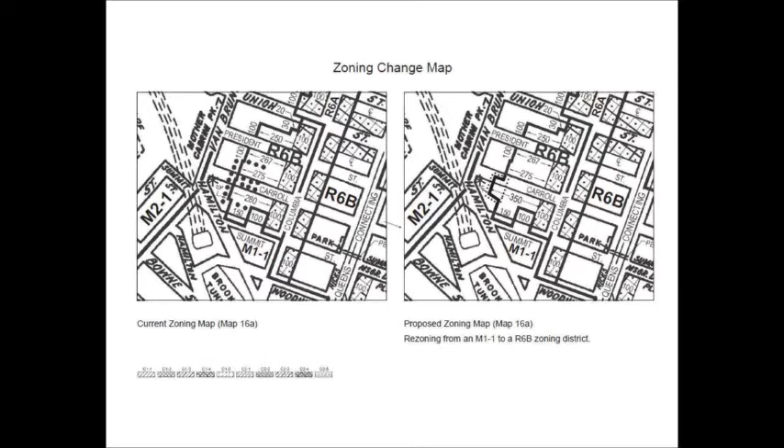In this photo, this space here is where the proposed development site is located. The zoning map amendment would rezone 3 tax lots from M1-1 to R6B, extending the neighboring R6B district to include the development site. Additionally, the zoning text amendment would establish a mandatory inclusionary housing area coterminous with the rezoning area.

The block within which the development site is located, block 352, and the block directly to the north, block 347, have been subject to a series of zoning changes similar to this application, changing existing M1-1 districts to residential districts to facilitate residential development.

In 2007, there were 2 such zoning map changes, one on each of these blocks, that changed an M1-1 to an R6 district at the time. So on the subject block, it was this little portion here that was rezoned.

More recently, in 2011, there were another 2 zoning map changes adopted from M1-1 to R6B district, again one on each of these 2 blocks. At that time, there were 6 tax lots located here, which brought the western edge of the R6B to where it is today.

In 2009, an approximately 86-block area of the Carroll Gardens and Columbia Street waterfront neighborhoods were rezoned from an R6 district to contextual zoning districts in order to reflect the scale and built character of the area.

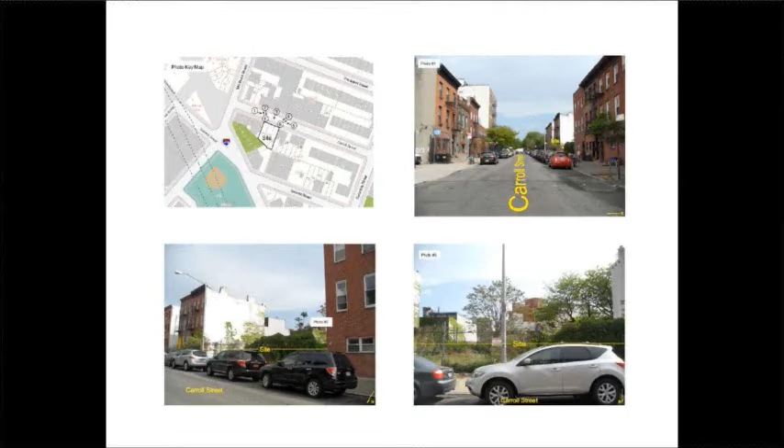Here are some photos of the existing conditions. We're looking at Carroll Street, and then taking a closer look again at the proposed development site, along with some photos of the developments directly across the street.

The proposed development is a 4-story, 10-unit residential building with a total of approximately 12,450 square feet of residential floor area, for a floor area ratio of 2.0.

There's an entrance to a driveway located right here on Carroll Street that will provide entrance to and egress from a driveway that leads to 6 accessory parking spaces located in the back of the building.

Because this application includes a rezoning from a non-residential zoning district to a district that allows residential uses as of right, a mandatory inclusionary housing area that is coterminous with the rezoning area would be established. All residential developments, enlargements, and conversions within this mandatory inclusionary housing area that meet the criteria set forth in the mandatory inclusionary program would have to comply with the requirements of either option 1 or option 2.

Option 1 requires that 25% of residential floor area be affordable to households that average 60% of the area median income, with a minimum of 10% of all residential floor area being affordable to households at 40% of the area median income. Option 2 requires that 30% of the residential floor area be affordable to households that average 80% of the area median income.

To facilitate this project, the applicant requests a zoning map amendment to rezone 3 tax lots from an M1-1 to an R6B district, as well as a zoning text amendment to establish a mandatory inclusionary housing area that's coterminous with the rezoning area.

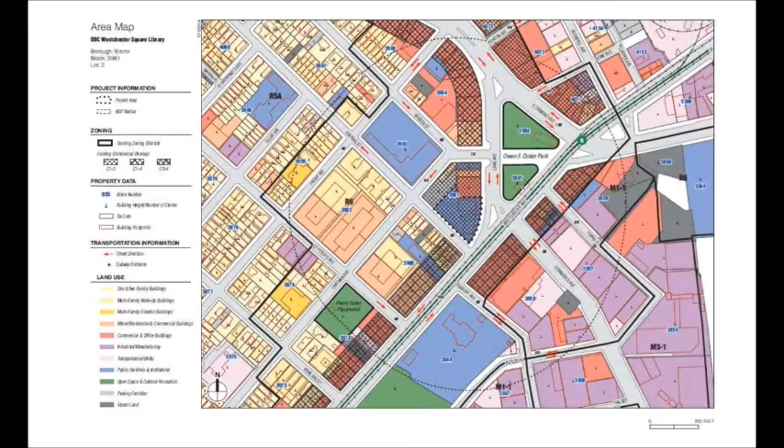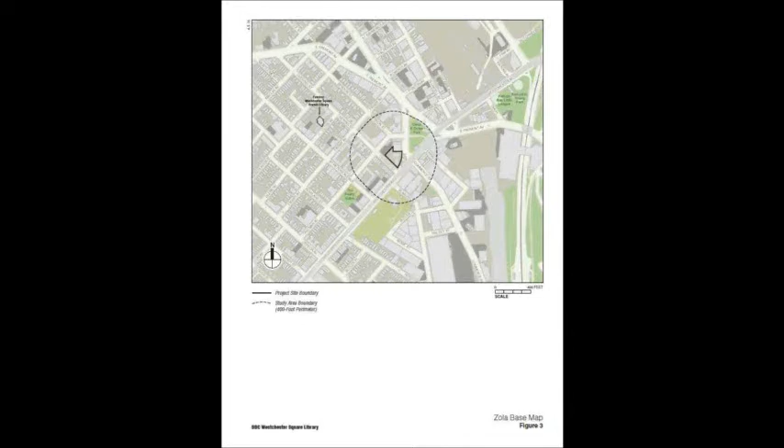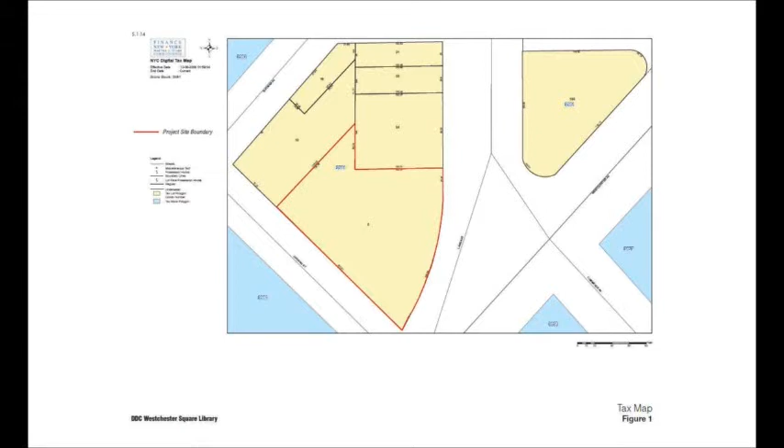For that reason, the intention is to subdivide. This is the existing property, which is now owned by the Huntington Free Library. This is a landmark building, and in addition to the library structure, the landmark structure itself, there is an annex building built in 1930, which is landmark eligible but is not landmarked. That will be part of the subdivided portion of the lot used for the new branch facility. In addition, there is a one-story enclosed connector connecting the main landmark building with the annex building.

Under the proposal, the existing lot of approximately 22,000 square feet will be subdivided. The free library will continue to operate independently on an approximately 13,000-square-foot reconfigured zoning lot. A new zoning lot will be created of approximately 9,000 square feet, and that will be the location of the new branch library. Here we have some images.

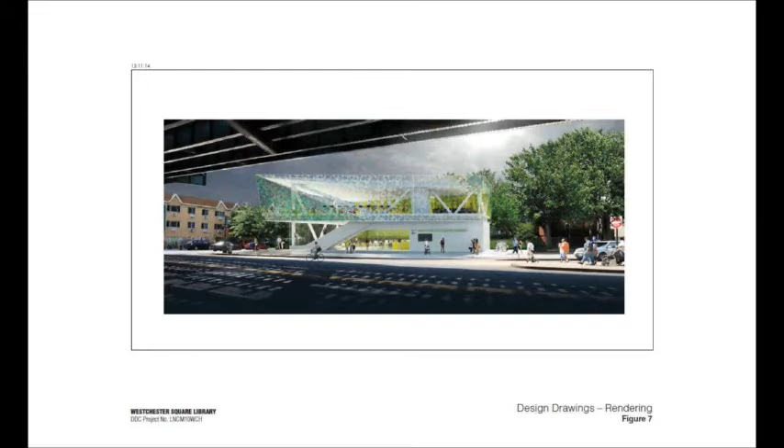Again, this is designed to be LEED eligible, ADA compliant, and the format is designed to reflect the new service modality, if you will. There will be 12,000 square feet of floor area on a two-story building. As the diagram shows, there will be one management kiosk that provides visual access and control of the entire floor. There will be a community room available for community activities, with new furnishings.

This will again be LEED eligible. To the extent possible, green design elements are included. There will be a new entranceway created along Westchester Avenue, which will include landscaping and a sitting area for the public. In addition, the grounds will be fully landscaped.

The Landmarks Commission has been informed and is approving of the proposed development project. There will be no impact on the landmarked Huntington Free Library other than the repair of the connection where the corridor links to the annex building. There will be, or has been, a landmarks determination in your package that there will be no significant effects of this proposal.

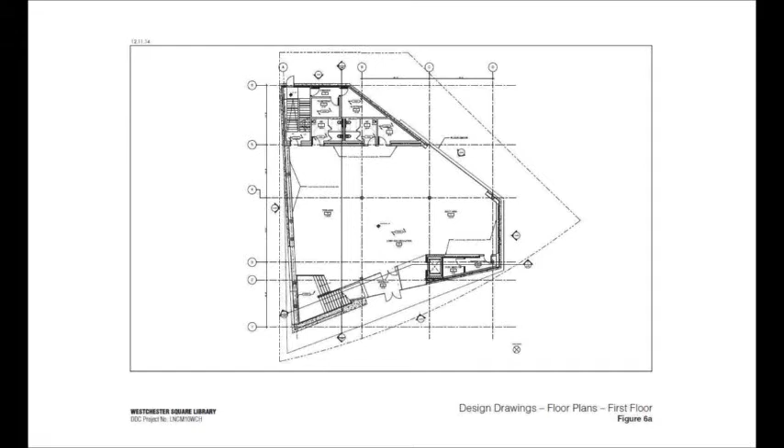Thank you, Dana. Questions? Yes, Ms. Effron, then Ms. Ortiz. Is the Huntington Free Library operating as a library now?

It is operating as a private research library, and it is landmarked and will continue to operate independently. We're acquiring a portion of the lot, not inclusive of the main building of the Huntington Free Library -- we are getting approximately 9,000 of the 20-some thousand square feet. So the library will continue to operate independently. DCAS will acquire the newly created zoning lot, and that will be the site of the new branch library.

Thank you. My understanding is the Huntington Free Library is outside the NYPL system -- independent of the public library system and will continue to operate independently. Ms. Ortiz: my question was answered, thank you. Any other questions? Ms. Levin?

You know, I realize that design is not exactly our purview on this one, but this looks like a really intriguing design -- on that page, right there. The thing that looks like a diagonal escalator, is that an escalator? It's not an escalator, it is a stairway up. Again, you have the open design; the intention is to maximize the natural light. The building is configured essentially to provide a view of the landmark Huntington Library next door.

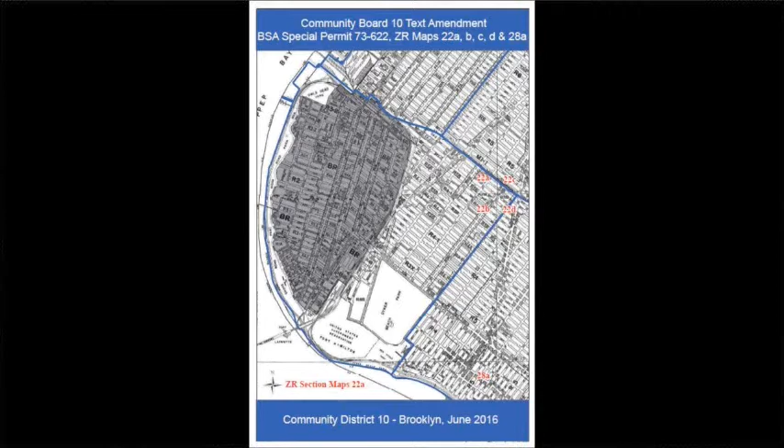These lower density and contextual districts include the 1- and 2-family R2, R31, R3A, R3X, R4A, R4B, and R41, and the multifamily R32 and R5B fronting many of the tree-lined avenues and most mid-blocks.

The multifamily and mid-density districts, R6A, R6B, R7A, and R7B, are mapped along the wide streets, including 3rd, 4th, 5th Avenue, Shore Road, Fort Hamilton Parkway, 11th and 13th Avenue. These wide streets have larger apartment buildings ranging from 4 to 8 stories, and with some exceptions, commercial overlays ranging from C1 and C2s along the local retail, allowing for local retail servicing the residential areas.

Now, the history of the BSA special permit. Back on December 22nd, 1997, the Planning Commission approved an application creating a new BSA special permit, the enlargement of single-family and two-family detached and semi-detached residences, originally intended as a citywide initiative.

During the City Planning Commission public review process, the applicability was restricted to 7 community districts: Brooklyn 10, 11, 15, and portions of Brooklyn's 12 and 14, and Staten Island's 1 and 2. Subsequent to the Planning Commission's approval, the City Council modified the text amendment, removing the Staten Island community districts 1 and 2. Though today limited to 4 community districts, the February 1997 Planning Commission report discusses the overall land use rationale for approving this special permit.

Citing the advent of contextual districts approved in 1989 and their more liberal FAR, front, side yard, height, and setback requirements that match the character of many low-density areas, reducing the degree of noncompliance. But as many of the low-density areas of the city had not been mapped as contextual districts and large numbers of residential buildings still remain non-complying, there was a need for an equitable process where homeowners who wish to enlarge could do so in a manner consistent with the surrounding neighborhood.

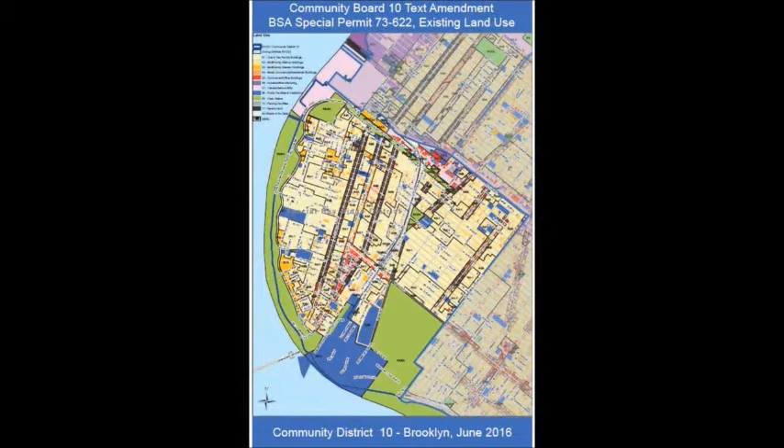From the department's point of view, CD10 is unique in so far as it had a special district that predates the text. Subsequent to the text, lower density and contextual districts were widely mapped throughout the district, some 400 blocks. There's a limited number of applications for CD10—only 21 applications over the last 18 years. By comparison, Boards 14 and 15 have had well over 200 applications each, in excess of 200 applications.

So it's just the text, which just takes out 10. You can see from this graphic that the 21 applications are widely spread throughout the district, not concentrated in any particular area.

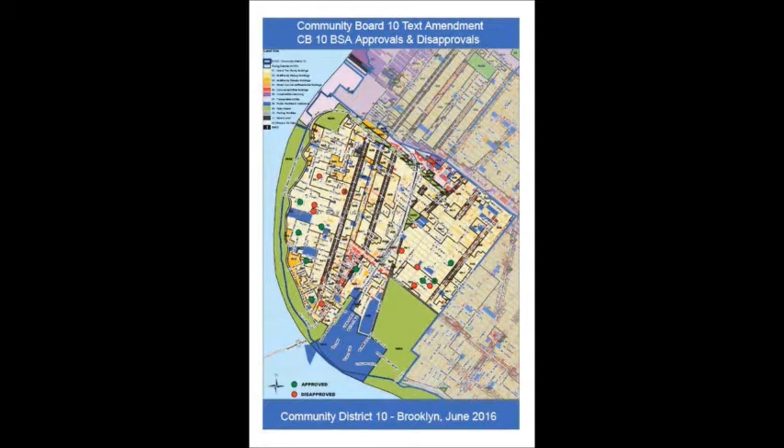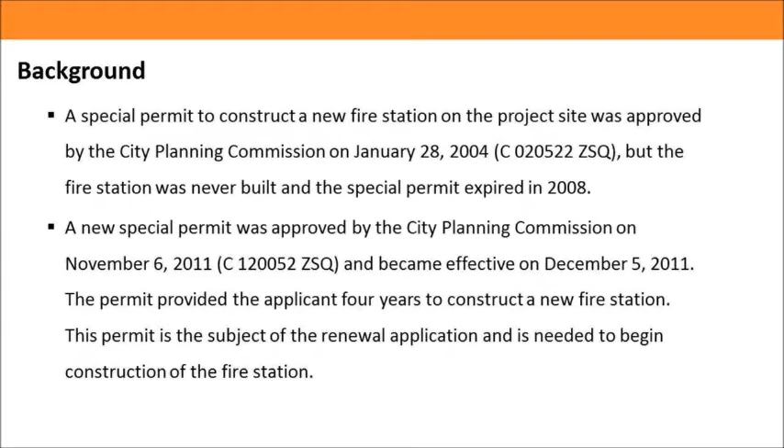Now, this is not the first special permit the Broad Channel volunteers had. They had a special permit in 2004, but the firehouse was never built, and the permit expired in 2008. They came back to the City Planning Commission for a second special permit to facilitate the same firehouse construction. That special permit became effective in December 2011 and is the subject of this renewal application.

Just to orient you where the existing firehouse site is, it is located on a relatively dense residential block on Noel Road in the middle of Broad Channel. The firehouse, as you see in the bottom picture here, was built in 1907, and that is where the Broad Channel Volunteer Fire Department provides emergency services at Broad Channel.

I'm highlighting here in the picture that the building is actually so small that they don't have the space to park all of their vehicles in the station itself, so they often need to find on-street, or in this case, on-sidewalk parking. But they have acquired, dating back to 1999, a vacant site that was formerly city-owned to the north of the current firehouse location, where they'd like to build a new 2-story, 10,000 square foot fire station.

They've secured all the funding that they need for the project. It's just a matter of getting that funding passed through the various agencies that have identified it for them.

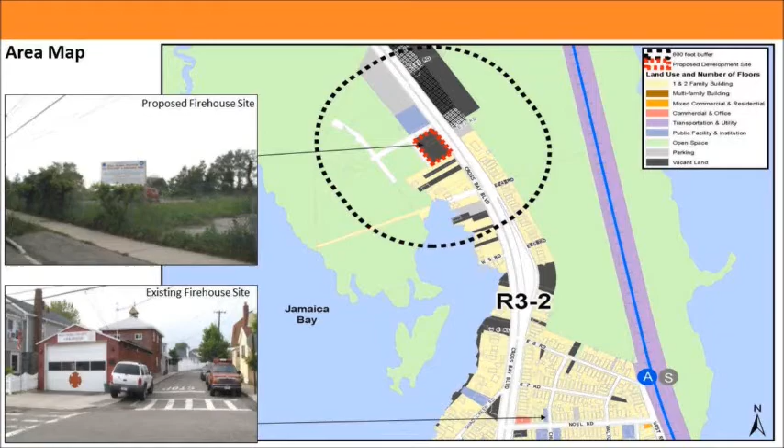Here's an elevation of the firehouse, again 2 stories, which would provide plenty of space for the Broad Channel volunteers to park their 4 trucks and the 1 boat that allows for responses to emergencies on the waters of Jamaica Bay.

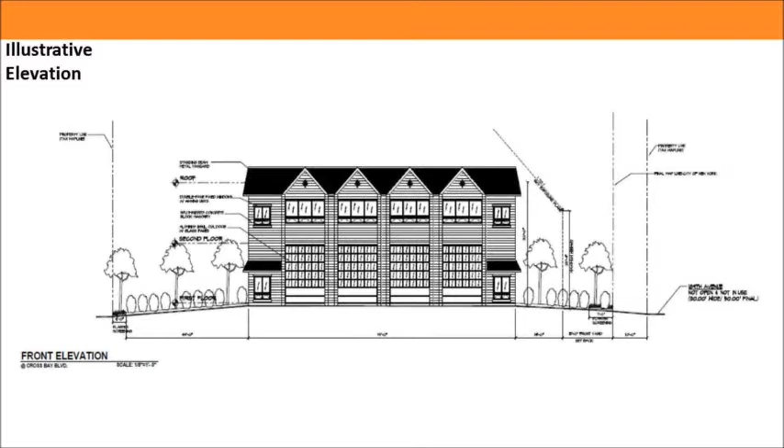As I mentioned, the permit can be renewed through City Planning Commission approval, so long as the commission finds that the facts based on which the original special permit was approved have not substantially changed. The project site has not substantially changed, the project has not substantially changed, and the Broad Channel volunteers maintain that the findings based on the facts of the original special permit have also not substantially changed.

In your commission packages, we did refer this out to Community Board 14 for 45 days, and they provided a letter continuing to express their support for the Broad Channel volunteers to build a fire station.

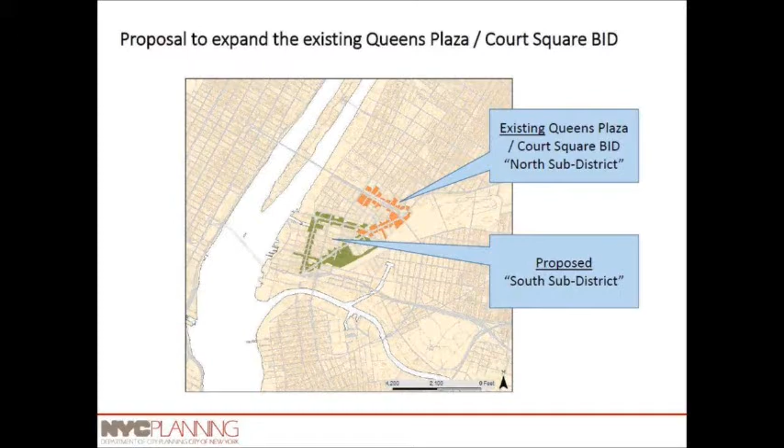This map shows the location of the existing BID, which will now be the North Subdistrict in orange, and the proposed expansion in green, which would be referred to as the South Subdistrict. The North Subdistrict includes properties along Jackson Avenue north of Court Square and businesses along Queens Plaza. The South Subdistrict includes properties along Jackson Avenue south of Court Square, along Vernon Boulevard and 44th Drive.

For context, the BID comprises much of the commercial core of Long Island City. To the north and east of the bid area, there is a concentration of industrial businesses, but the bid has decided not to include these in the service area because the needs of these businesses tend to vary from the commercial businesses at the core, and initial outreach suggested they were less interested in being part of this bid.

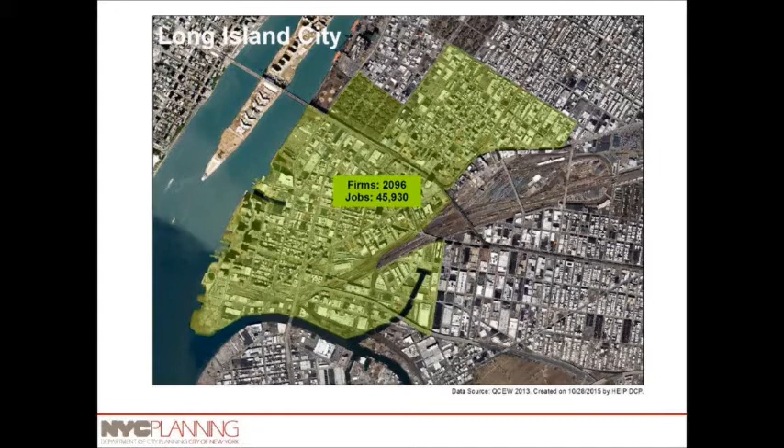Since 2001, there have been a number of zoning actions affecting most of Long Island City, and there's currently a significant amount of new residential and commercial growth in this area. In 2013, there were more than 2,000 businesses that employed nearly 46,000 people.

Looking at the existing North Subdistrict, there are 2.8 million square feet of office currently, and another 1.1 million square feet in planning. What's really staggering is there are 669 residential units and 4,085 in planning or construction. There are 47 existing businesses, including a few large corporate back offices, a number of retail businesses, and 2 hotels. Presumably, as many of those residential units come online in the next several years, there will be more retail and other businesses in that area as well.

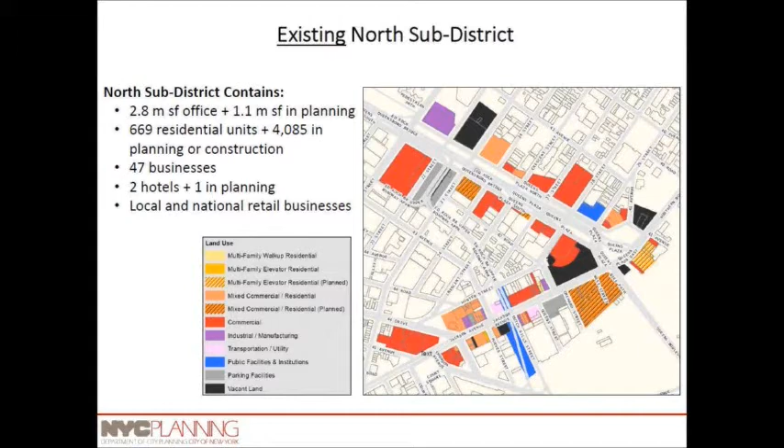Looking at the proposed South Subdistrict, this is a much more mixed area and has quite a few more businesses. There are 190 businesses, many located along Vernon Boulevard on the west side of the proposed bid, which is really the main commercial spine of the area. Many of these are in 2 to 3 story buildings, often with retail or professional services on the ground floor and residential above. There are also 18 industrial businesses.

Many of these are lighter industry, auto repair, and general contracting. There's also a lot of residential growth, with 2,700 units in planning or construction in the South Subdistrict.

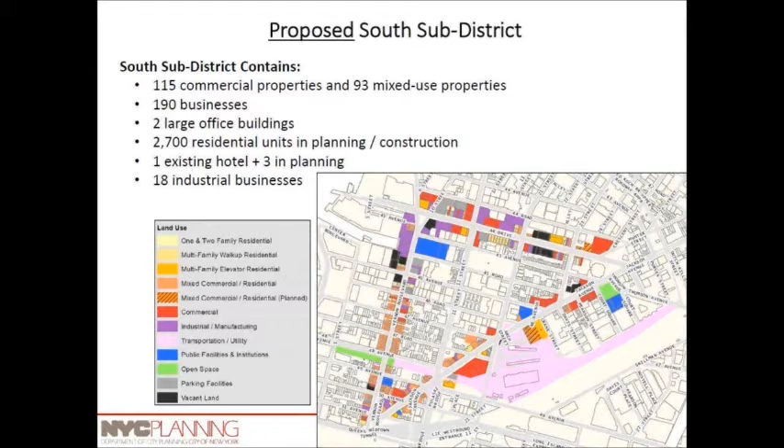There are several small public spaces, both within the bid area and some adjacent to it but within the general corridor. The image on the top left is from the Citibank building, maintained by Citibank. On the bottom left is a vegetated median along Jackson Avenue, which the bid currently maintains with funding from EDC. On the right side are images of small parks along the bid corridor that are excluded from the bid service area. The bid has explained that they would be supportive of efforts to maintain and enhance these areas, but do not want to take on full responsibility for their maintenance.

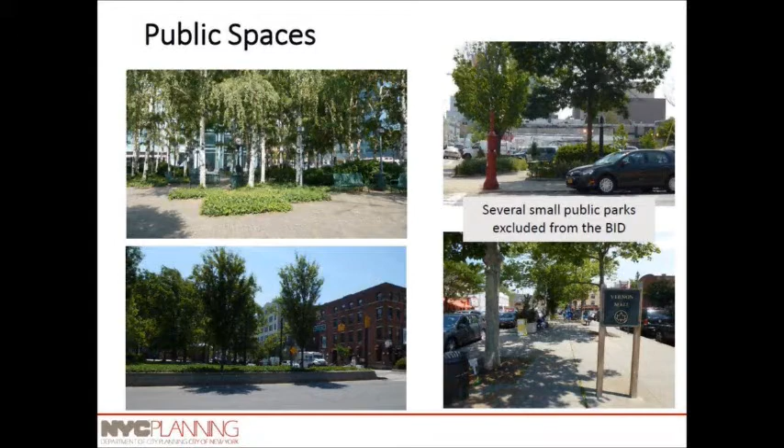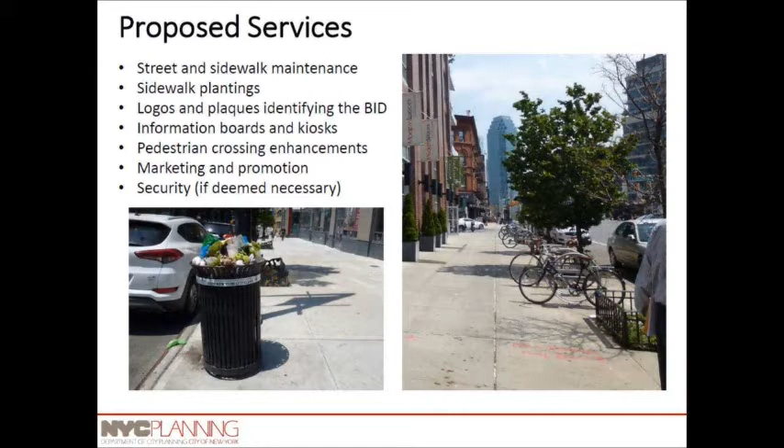Proposed services of the bid mainly include sidewalk and street maintenance, including sidewalk sanitation and tree planting, informational boards and wayfinding and pedestrian crossing enhancements, and there's also funding for marketing.

The proposed first-year budget is $800,000. They have separate budgets for the north and south sub-districts to reflect different needs of those streets: $450,000 for the north sub-district, $350,000 for the south sub-district. The bid has projected that 60% of properties would pay $660 or less in their assessment for the first year.

The Long Island City Partnership did outreach to assess the level of community support. There were 626 properties surveyed, and of those, 122 responded. 119 of those 122 were in favor of the bid, and 3 were opposed.

This went to both Community Boards 1 and 2, and they both voted in favor. So that's all I have prepared. I'm happy to take questions.

Questions for Dylan? Mr. Knuckles. Thank you. This is your first time, Dylan? It is. Congratulations. Very well. Hopefully it won't be your last, Dylan. He's not going to, we'll ask. See how it goes. I guarantee you a second appearance.

My first impression is, given the configuration of these and the geography of the second proposed bid in contrast to the first, why is there a smaller budget for the south sub-district, 350 versus 450?

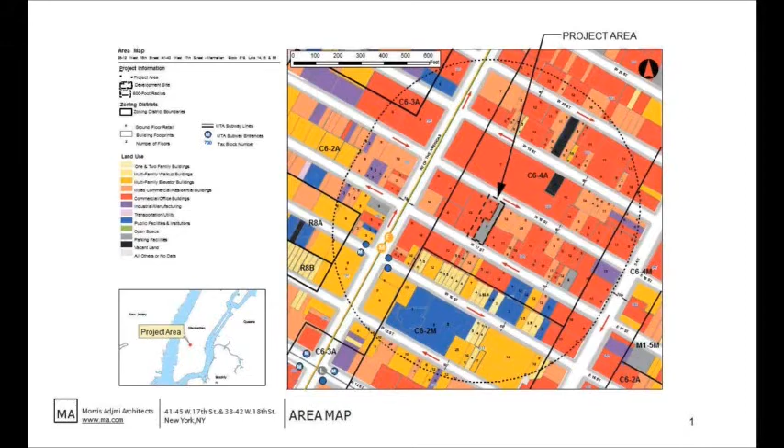Currently on Lot 14 is a 4,600 square foot through lot with 25 feet of frontage on West 17th Street and West 18th Street. The existing historic building on this lot is a 6-story commercial building built in 1907 as a loft and a store. This 6.0 FAR building will remain and be restored.

Lot 66 is in the center of the project area and is a 2,100 square foot lot which has 25 feet of frontage on West 18th Street. It contains an existing 4-story commercial building with an FAR of 3.37. This building will be enlarged by the proposed project. This 4-story historic building was originally built as a dwelling in 1865 and was converted to commercial use in the 1890s. The existing building contains a commercial use and will remain and be restored. Both buildings are contributing buildings to the Ladies Mile Historic District.

Lot 15 is a 7,100 square foot lot and is an irregularly L-shaped lot parcel with 25 feet of frontage on West 18th Street and 50 feet of frontage on West 17th Street. This lot is currently used as an at-grade parking lot for 54 vehicles. This lot will be developed with a 16-story building segment fronting on West 17th Street and a 17-story segment fronting on West 18th Street. Both portions of the new building will have commercial and residential uses.

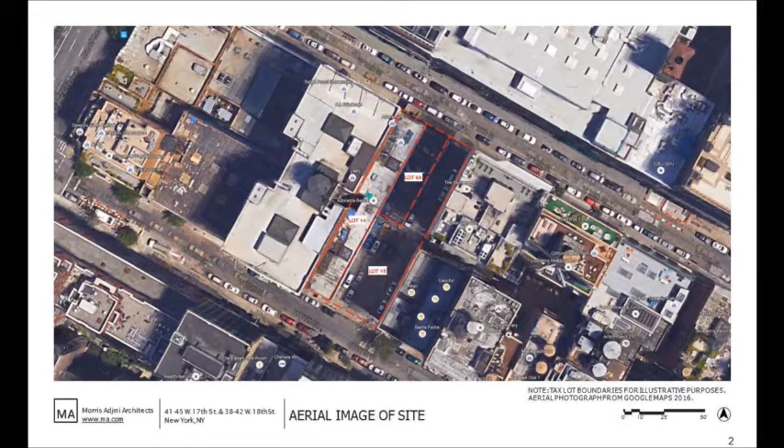The proposed developments on Lot 66 and Lot 15 are the subject of this application for waivers. The depth of the block between 17th and 18th Street is 184 feet. The proposed project includes the construction of a new building on Lot 15, the enlargement of an existing building on Lot 66, and the restoration of 2 existing historic buildings on Lot 66 and 14.

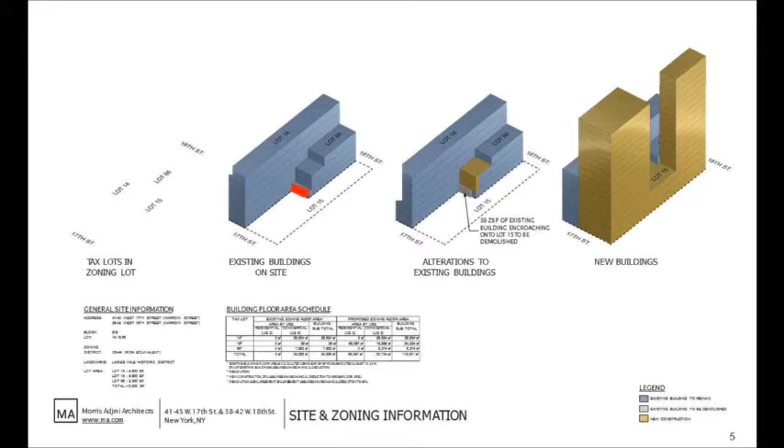The applicant intends to develop an approximately 84,024 square foot mixed-use building containing 68,097 square feet of residential use, which will provide 66 units of market-rate housing, approximately 15,296 square feet of commercial space, a below-grade parking garage with 17 accessory parking spaces, and 39 bicycle parking spaces. Lot 15 would generate approximately 71,000 square feet of floor area.

The building will utilize 13,024 square feet of unused development rights from the remainder of the zoning lot. At completion, the zoning lot will contain 118,831 square feet of development and achieve an 8.6 FAR, which will be less than the permitted maximum floor area of 138,000 square feet under a 10 FAR.

The proposed building would have a residential lobby on both West 17th and West 18th Streets. There is a separate entrance on West 17th Street for the ground floor retail space. Lot 14 has one entrance on West 17th Street and one entrance on West 18th Street, and Lot 66 has an entrance on West 18th Street.

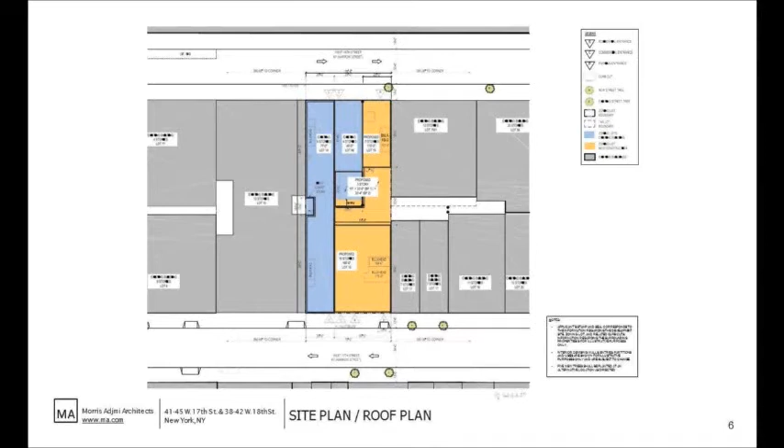The proposed development would require a special permit pursuant to Section 74-711 of the zoning resolution for development within a historic district to allow for waivers. At the time of certification, the applicant was requesting 4 waivers. Since then, due to the approval of the Zoning for Quality and Affordability text amendment known as ZQA, the applicant currently only needs the following waivers.

The first is the maximum permitted base height in a C6-4A zoning district, which is 125 feet, with a 15-foot setback required. The requested waiver would allow the front wall to rise without setback above a maximum base height of 125 feet on West 17th Street. The building's West 18th Street wall will exceed the maximum height of 60 feet allowed for a building with less than 45 feet of frontage on a narrow street, and the West 18th Street facade would rise to 170 feet without setback.

The second waiver is the minimum distance between windows. The minimum required distance between buildings is 60 feet on a single zoning lot. The building facades on West 17th and West 18th Street will have a distance of 50 feet between them. According to the applicant, this will allow for building footprints that provide usable floor plates for residential use.

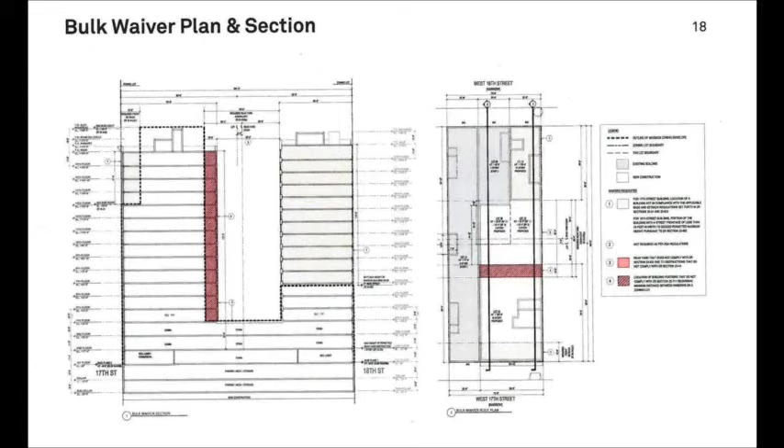The maximum permitted height for a building with less than 45 feet of frontage on a narrow street is 60 feet. The building's West 18th Street wall would rise to 170 feet. According to the applicant, this would allow for a building facade that reflects the loft buildings characteristic of the neighborhood.

Then there's the final waiver, the rear yard waiver. The West 17th Street front wall will encroach into the rear yard equivalent by 10 feet, resulting in 50 feet of rear yard equivalent.

Section 74-711 says, in all districts for zoning lots containing a landmark designated by the Landmarks Preservation Commission, or for zoning lots with existing buildings located within a historic district designated by the Landmarks Preservation Commission, the City Planning Commission may permit modification of the use and bulk regulations, except FAR regulations, provided that such bulk modification shall have minimal adverse effects on the structures or open space in the vicinity in terms of scale, location, and access to light and air.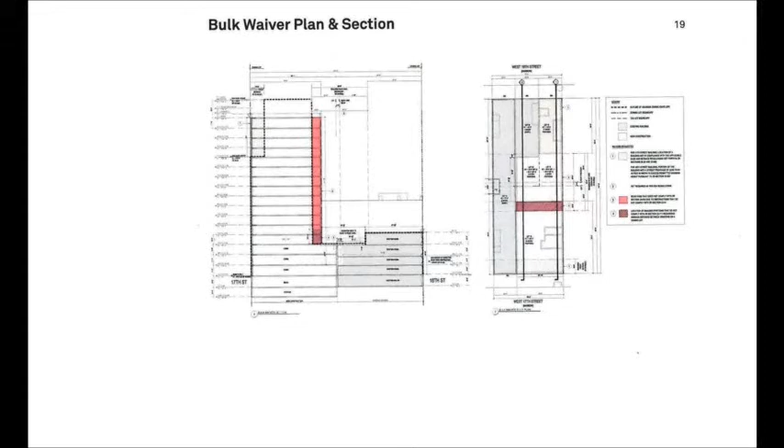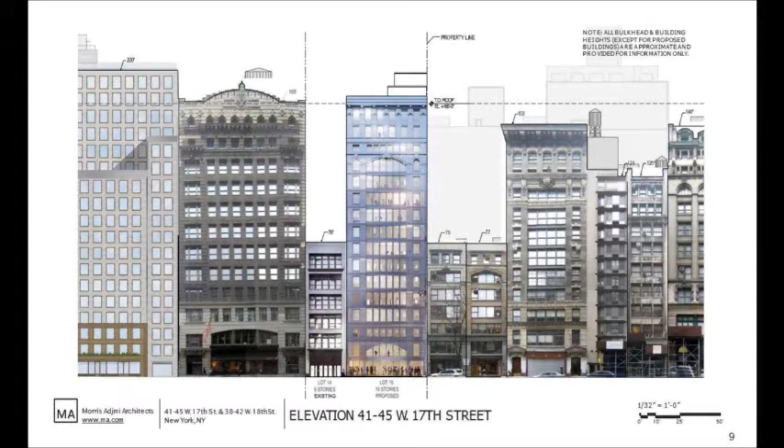The design of the proposed building facades, as approved by the Landmarks Preservation Commission, will provide a street wall that is consistent with many mid-block buildings on West 17th and West 18th Streets between 5th and 6th Avenues that rise over 150 feet without setback.

Community Board 5 held a public hearing on this project on May 12th, 2016, and by a vote of 40 opposed, 1 in favor, and 3 abstentions, recommended denial of the application unless the mandatory inclusionary housing program is applied in accordance with the zoning resolution as defined in Section 23-92. They also feel that the rear yard requirements would result in a negative impact to adjacent buildings.

The Borough President also recommended denial of the application unless the mandatory inclusionary housing program is applied to the proposed project, and feels that the requested waivers would have an adverse impact on nearby buildings on the block.

At the time of certification, several commission members raised the following questions: How does the proposed project differ from the project proposed in 2004? According to the applicant, the previously approved project was an entirely different building designed by a different architect. The 2004 building design called for a 4-story enlargement on the 2 existing historic buildings, a 16-story building on West 17th Street, and a 13-story building on West 18th Street.

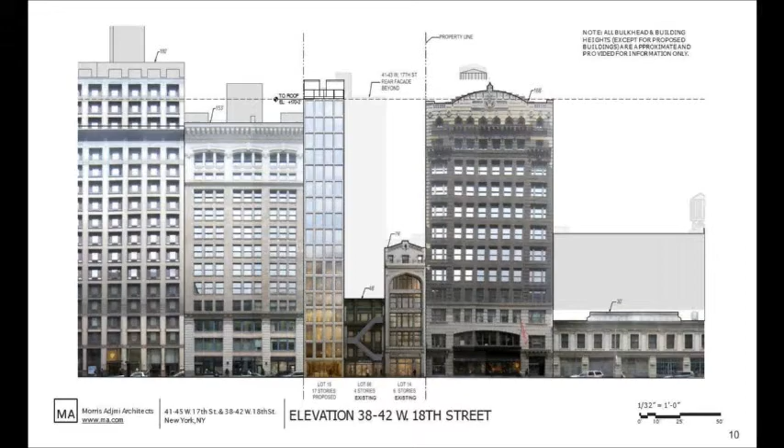Good afternoon, Commissioners. As Beverly outlined, Community Board 5 and the Manhattan Borough President's Office have raised questions as to whether MIH would apply to Adorama's application for a 74-711 special permit. The short answer is no, it wouldn't apply. MIH applies to special permits that would significantly increase permitted residential floor area. So the archetypal situation is, say, a 74-711 that was enabling new residential floor area within a manufacturing district.

The proposed MIH does not apply when an applicant is just seeking bulk modifications to reconfigure residential floor area that's already permitted. Since this development lies within an existing R10 equivalent district, and since none of the actions before the commission would or could increase residential capacity here, and since bulk modifications alone wouldn't trigger MIH, then MIH would not apply to this application.

The commission anticipated this situation in the CPC report and was clear on the issue. I made copies of the relevant sections of the report and can distribute them through land use review after the review session.

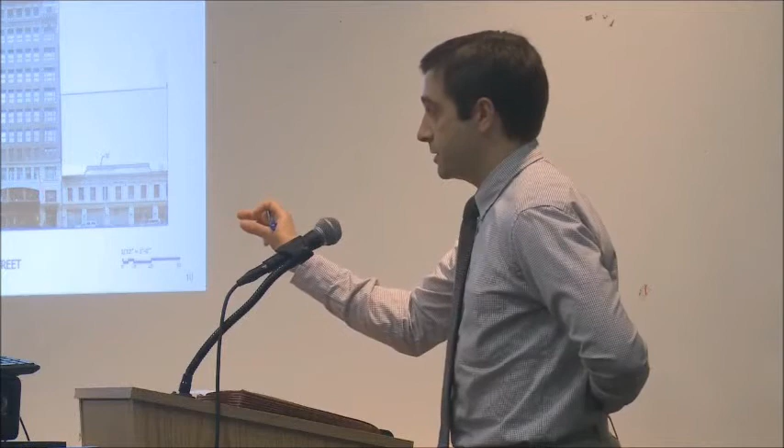And so we're often faced with the situation where people want us to include redundancies in the zoning resolution. Why didn't we put permitted floor area in there? I think it's because if we put redundancies in certain parts of the zoning resolution, then it calls into question why it's not in those other places in the zoning resolution where we haven't included that redundancy. So just for legal reasons, structurally, we want to ensure that consistency from place to place.

And I understand that that's something that we in the department understand, but isn't always clear to others. As for the understanding of the community board and the borough president, we did attempt to be as clear as possible, the commission attempted to be as clear as possible in the CPC report. And as I said, I'll distribute the relevant section. I mean, I can read it to you right now, if that would be helpful.

The commission anticipates applying the MIH program to special permits that increase residential capacity. The program is not expected to be applied in conjunction with special permit applications that would reconfigure residential floor area that is already permitted under zoning without increasing the amount of residential floor area permitted. Under this policy, for instance, a special permit that facilitates the transfer of floor area from one zoning lot to another without increasing FAR would not be subjected to an MIH requirement, while a special permit that converts non-residential floor area to residential floor area would be.

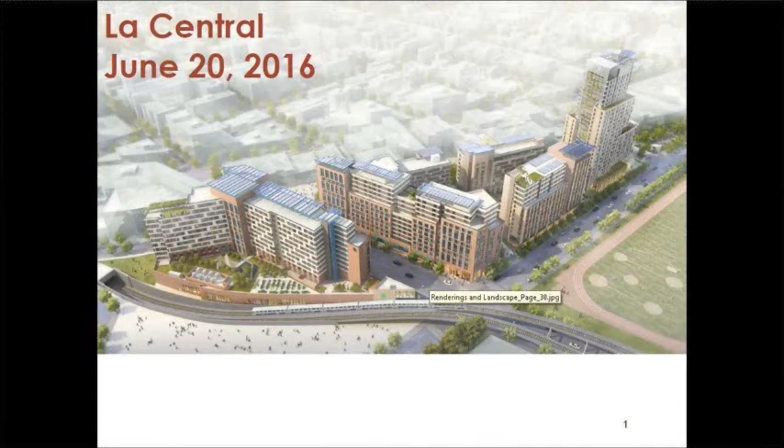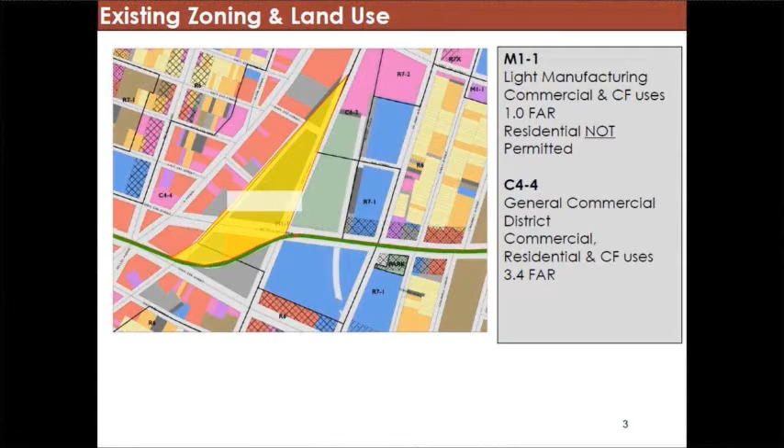I'm going to quickly go through and give a little refresher here. The proposed development is highlighted in yellow. Today, the majority of the site is M1-1, which permits 1 FAR of commercial, community facility, and light manufacturing uses. The southern portion is today C4-4. Today, the site is currently vacant.

A little bit about the surrounding area and the site itself, which is pretty important for this site. The proposed project is located in the Melrose neighborhood of Community District 1, within the area known as the Hub, considered the retail center of the South Bronx, only 1 block from the development site. You have the convergence of Westchester Avenue, 3rd Avenue, and Melrose Avenue, one of the key commercial intersections in the Bronx. 2 blocks north of the site is the 221-unit Via Verde development.

There are a number of public institutions surrounding the area: University Heights High School, Mott Haven Village Prep, Crotona Academy High School, which has an adjacent field of 166,000 square feet, the Merrill Lynch Field of Dreams. Additionally, the Hostos Lincoln Academy of Science is located on East 149th between St. Ann's and Eagle. St. Mary's Park, the largest park in the South Bronx at 35 acres, is located to the southeast of the site.

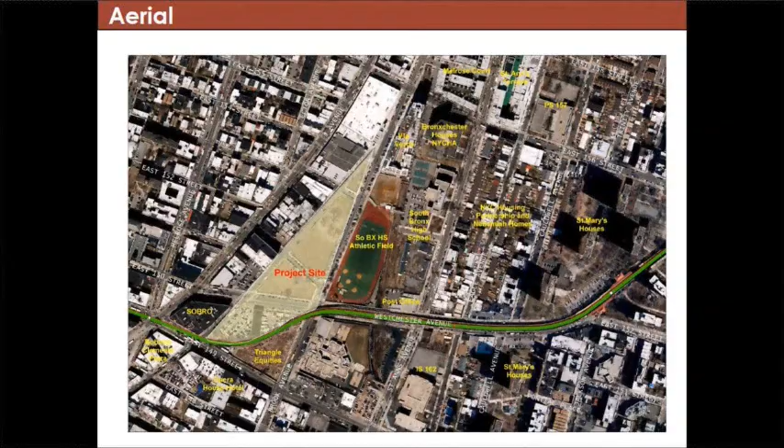The area is well served by mass transit. You have the 2 and 5 elevated rail line that runs along Westchester Avenue in the southern portion of the site, and there are 6 bus lines that intersect the area.

There's a series of photos about the site. The takeaway, without going through each one, is that today the site is currently vacant. You can see the elevated rail line as it begins to go underground behind the site. The site is really a missing connection between the key commercial corridors of Westchester, 3rd, and 149th Street, and activation of the site will be a key piece in bringing this area together.

The applicant, HPD, is proposing a series of actions that will facilitate the creation of a large-scale general development. This will comprise 5 mixed-use buildings including 832 units of affordable housing and 162 units of supportive housing. HPD can speak more to the mix, but it is to be 50% under 60% AMI, 30% between 60 and 80% AMI, and 20% up to 100% AMI. The median household income in Bronx Community District 1 is $21,000.

The site will also include 46,000 square feet of commercial floor area and 124,000 square feet of community facility space. This includes a YMCA that's 50,000 square feet, and additionally, studio space for BronxNet television will be included. There are 209 underground parking spaces, 426 bike spaces, and 90,000 square feet of open space.

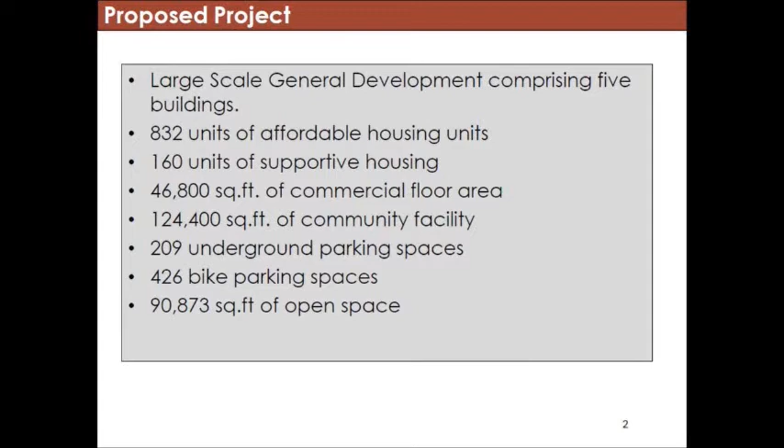The buildings on the site will range between 9 and 13 stories, aside from Site E, which will rise up to 25 stories. That site will also include the Sloan Digital Sky Survey Telescope, which will be remotely operated by the Bronx High School of Science.

The actions that will facilitate this development, certified on April 11th, include the disposition of city-owned property and a zoning map amendment to rezone portions of 3 tax blocks from M1-1 and C4-4 today to C6-2 zoning, which has an R8 residential equivalent in this non-contextual development that will go up to 7.2 FAR. Additionally, the amendment to Appendix F to add the project to the list of MIH housing areas. They will be mapping options 1 and 2 as part of this proposed development.

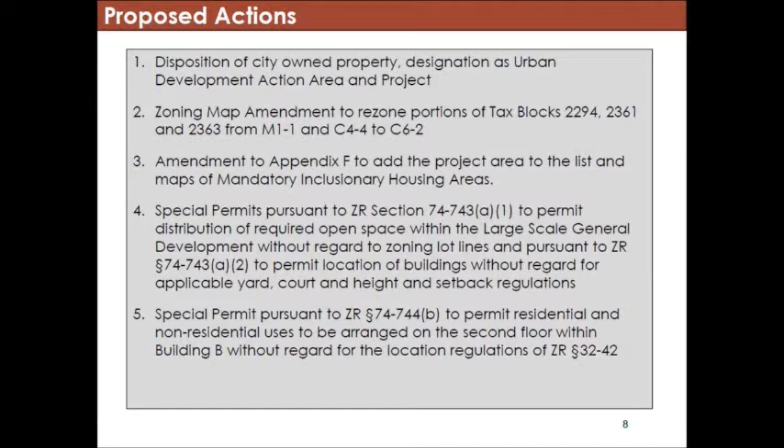Additionally, they will need special permits to permit the distribution of required open space within the large scale, and a special permit to permit residential and non-residential uses to be arranged within the second floor of Building B without regard for location regulations. That is for the TV studio space, which will have its own separate entrance as well.

Here is the zoning map amendment to C6-2 from the C4-4 and M1-1 today, and a site plan indicating the different buildings, A through E. A little difficult to read, but you can see buildings A, B, and D will be completed in phase 1. This will be a phased development. Phase 1 will commence in 2017, phase 2 will begin a year later, with final completion of the development prior to 2020.

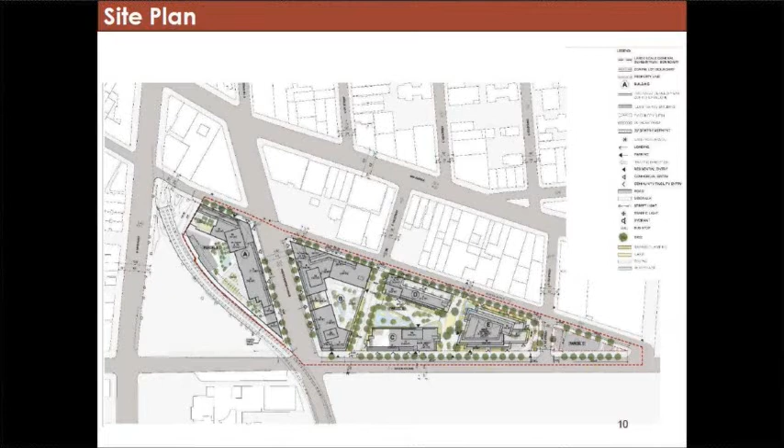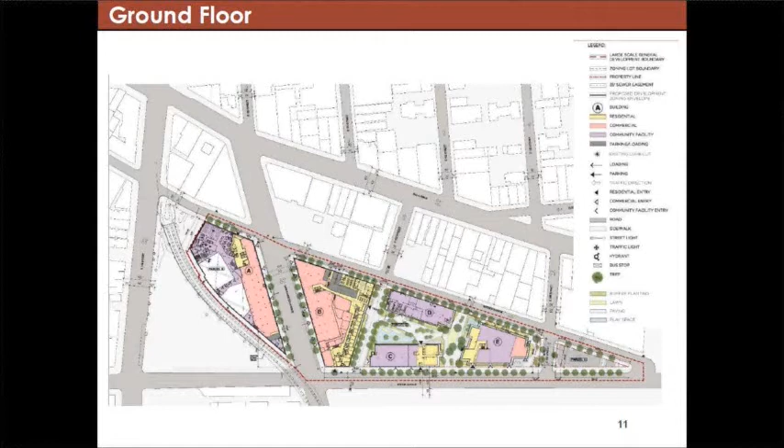Again, you can see just a little bit of the proposed site layout. Commercial uses are concentrated along Westchester Avenue. Uses in Building A will have the YMCA, along with the proposed rooftop farm. Buildings C, D, E, and A will all have landscaped open space on the roof. C, D, and A will have seating available for residents, and a private terrace will be on the 9th floor of Site B, available to residents of that building.

Quickly, you can see some images of the building. What's really important is how the street grid is able to extend through the site. Here's where the elevated 2-5 line goes underground in the back of the site. This is where the proposed rooftop garden space is, backing up to the rail line. The proposed YMCA site is on the ground floor of Building A, the highest, 25-story building, with the telescope site located on the northern portion of the site.

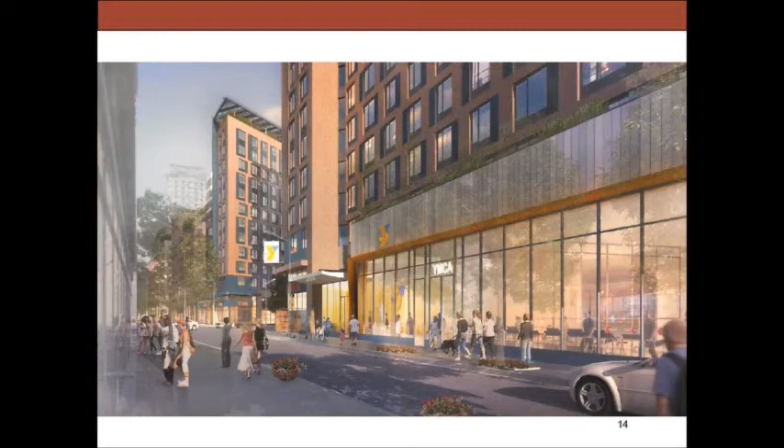And so with that, I'll open it up to questions. I think this project came through relatively recently and should be familiar to everyone.

A community board hearing was held on 4/28. The vote was positive, 23 yes votes with 1 abstention. There were three conditions with that vote. First, that Community Board 1 does receive the 50% community preference, and that the rental management company hired by Hudson Companies and HPD will continue to provide a report on the status of this preference. Second, the board shall receive ongoing reports on how local CB1 residents are hired and permanently retained on the project during and after construction. Third, that there is continuous dialogue by the developer to the board, keeping them informed quarterly on each phase of the project. HPD and the developer are currently working closely with Community Board 1 to meet these conditions.

The Borough President's Office held a hearing on May 17th. We do not have that recommendation yet, but we hope to receive it today, or certainly before the hearing on Wednesday.

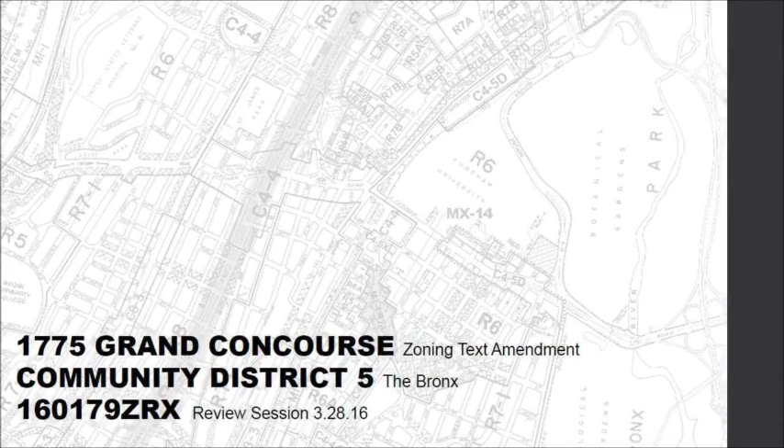This was referred out on March 28th, so relatively recently, but just to refresh everybody's memory, the requested action is a proposed text amendment by 1775 Grand Concourse LLC to allow indirectly illuminated signs on the street frontage of commercial infill sites within the Special Grand Concourse Preservation District in Bronx Community District 5.

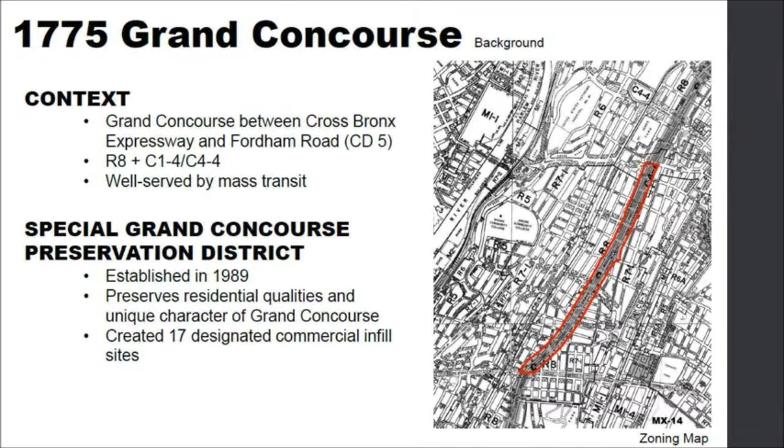Just a little bit of context, the area we're talking about is Community District 5 along the Grand Concourse between the Cross Bronx and Fordham to the north. It's zoned R8, with occasional C1-4 and C4-4 overlays. It's very well served by mass transit, the B and D lines are within proximity, as well as several bus lines.

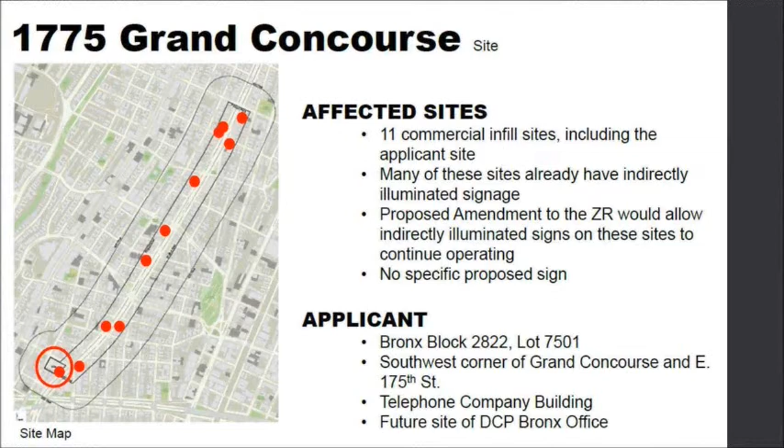These affected sites, there are 11 of them, including the applicant site, located towards the south. Many of these sites already have indirectly illuminated signage, so the proposed amendment would allow those signs to continue operating. There's really no specific sign proposed. The applicant is 1775 Grand Concourse LLC, located at Bronx Block 2822, Lot 7501, on the southwest corner of Grand Concourse and East 175th Street. Here are a couple of photos of the site.

The top tax block right here. This is street level. It shows several businesses on the ground floor, one of which is Con Edison. You can see the sign—they have the signage, but obviously there's no illumination.

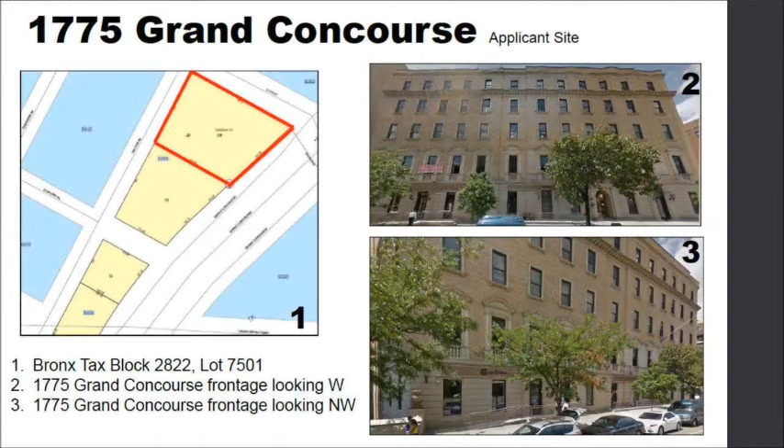In terms of what it would do for the area, we think it would improve the streetscape along the Grand Concourse, garner new foot traffic, boost visibility, and increase safety for pedestrians, without having the implications that directly illuminated signage would. This was referred out on March 28th. Community Board 5 in the Bronx unanimously approved it on May 25th, and the borough president has no plans to submit anything. Thank you. Questions?

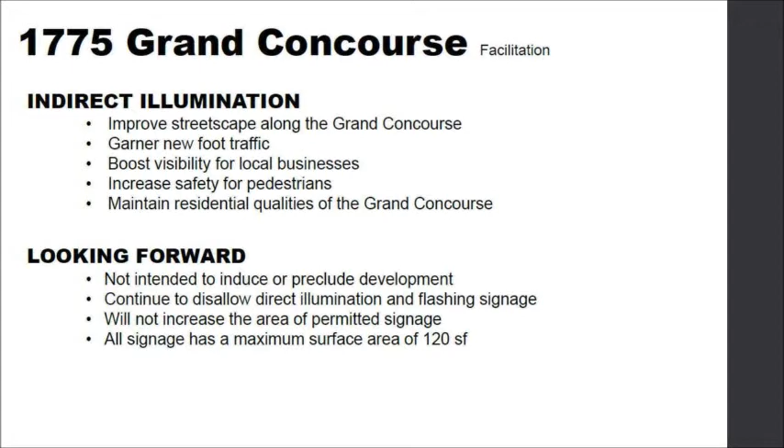Great, you have an uncontroversial item—I just have a question. Not so fast, Ms. Ortiz. I find it interesting that these signs are not currently allowed. What is the status citywide, in terms of the indirectly illuminated signs?

Well, they're not currently permitted within that district along the Grand Concourse, just because it's an R8, so it's more residential supposedly. But these were sites that were mapped out when the special district was created. So it's unique to this special district that these are not allowed—this is more a correction in a way? Right, yeah, so we think it's a good middle ground between allowing the commercial properties to operate and having residential in the area as well. Okay, thank you for that clarification.

Any other questions for Hannah? Thanks. Let's now advance to item number 10, page 302: Empire State Development's proposed Fountain Avenue Land Use Improvement and Residential Project, General Project Plan, to facilitate affordable housing in Community District 5, Brooklyn. Our presenter is Corbin Manning. We're on item number 10, page 302, Brooklyn non-ULURP.

Thank you, good afternoon Commission. The Empire State Development Corporation is proposing the Fountain Avenue Land Use Improvement and Residential Project pursuant to a general project plan to facilitate a mixed-use development with 1,169 units of affordable housing, ground floor retail, and community facilities space on two parcels on a block containing the New York State Office for People with Developmental Disabilities, former Brooklyn Development Center in the Spring Creek section of Brooklyn's Community District 5. The Commission is reviewing the general project plan because it requires the override of local zoning for implementation.

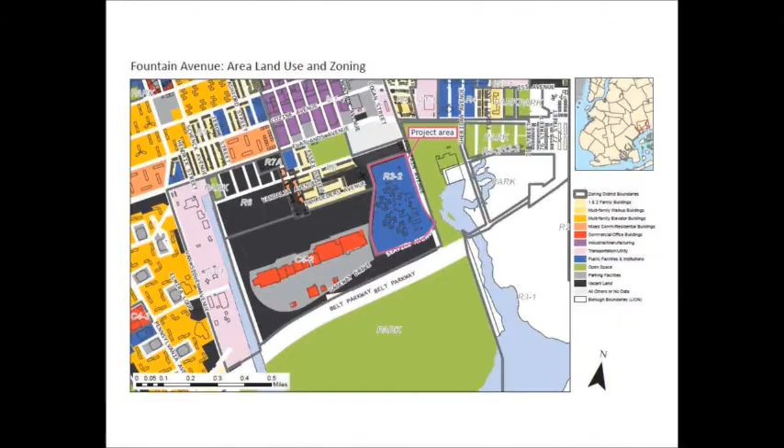The Brooklyn Development Center consists of an approximately 35-acre site in the Spring Creek neighborhood of the East New York section of Brooklyn, bounded by Vandalia Avenue to the north, Fountain Avenue to the east, Seaview Avenue to the south, and Erskine Street to the west.

The property is owned by the people of the state of New York, acting through the Dormitory Authority of the state of New York, and is operated by OPWDD. The property served as a residential center for people with developmental disabilities from 1974 through 2015. As part of the state's ongoing transition to supporting individuals with developmental disabilities in community-based settings, the residential portion of the Brooklyn Development Center closed on December 31st, 2015, and is currently used for OPWDD administrative offices. There is no current redevelopment plan for the remainder of the property other than what is proposed for the 2 development sites through this general project plan.

A portion of the property, comprised of 2 non-contiguous, primarily undeveloped parcels totaling approximately 6.7 acres, have been deemed as surplus property and comprise the development site. Parcel B, Lot 500, is located on the northern edge of the property along Vandalia Avenue and is approximately 4.7 acres. Parcel A, Lot 500, is located at the southwest corner of the property across from Gateway Center Mall and is approximately 2 acres. Both parcels are minimally developed with parking lots, driveways, and lawn areas.

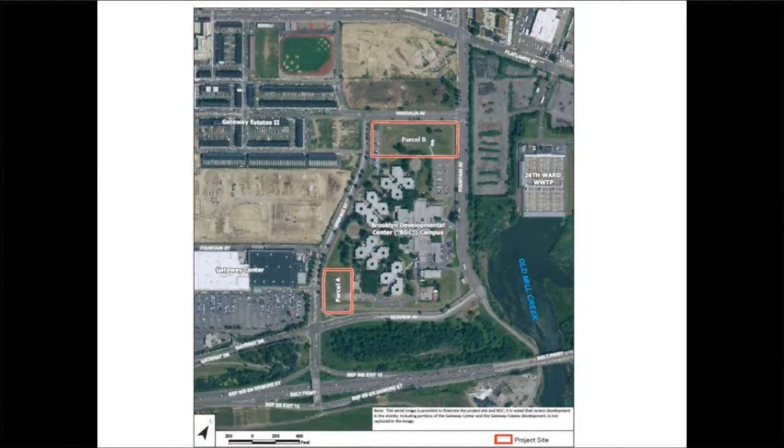The proposed development would create 1,169 units of affordable housing, and approximately 122,500 square feet of commercial space.

The general project plan would require that 100% of the units developed as part of the proposed action would be targeted to affordability levels at or below 60% of AMI. The general project plan would also require that approximately 200 units would be set aside specifically for low-income senior citizens. In addition, up to 20% of the non-senior units would be designated for people with intellectual and developmental disabilities.

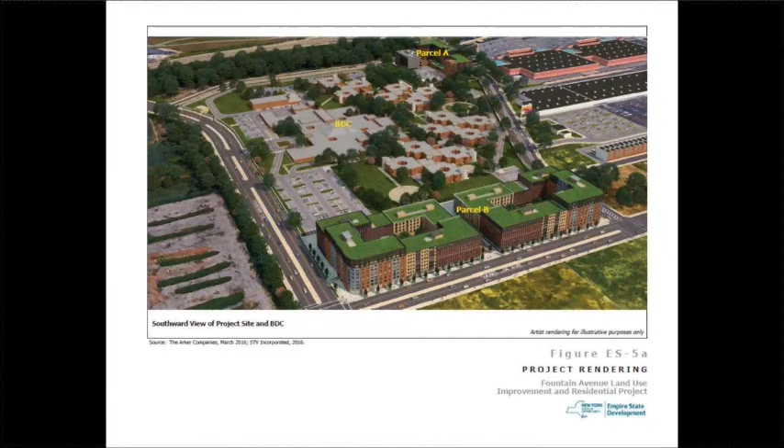Parcel A would be developed as a pair of attached buildings containing a total of approximately 332 residential units, approximately 44,756 square feet of commercial area, and approximately 221 parking spaces. The building group on Parcel A would be comprised of 2 buildings with varied masses, with heights from 6 to 9 stories, approximately 65 to 95 feet in height, with no setback.

The building group would be situated at the western and southern lot lines at the sidewalks of Erskine Street and Seaview Avenue, respectively. As currently envisioned, Parcel A would include a mix of apartment types, including studio, 1, 2, and 3-bedroom apartments. Commercial, retail, and/or office space would be developed at the ground floor of Parcel A buildings along Erskine Street. 118 parking spaces would be provided in a below-grade garage that would extend throughout the central area of the building group, and approximately 2,200 square feet of private open space would be developed atop it, accessible to Parcel A residents from the second floor of each building.

Outdoor surface parking would also be provided at the northeastern corner of Parcel A.

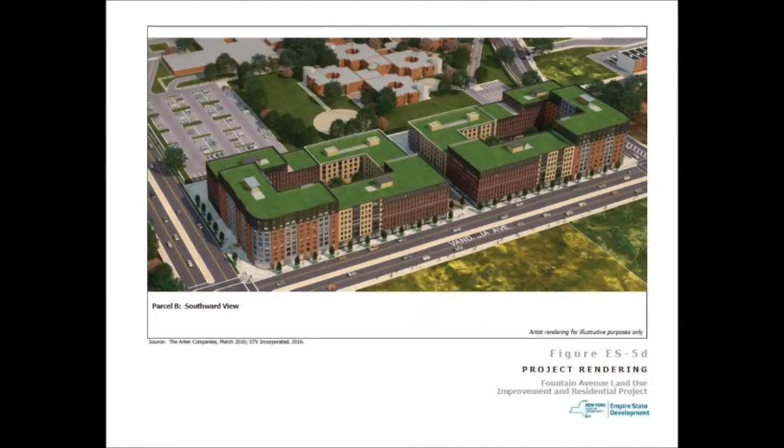Parcel B would be developed as 2 separate building groups, altogether containing a total of approximately 837 residential units, approximately 60,704 square feet of commercial area, and approximately 254 parking spaces. The 2 building groups on Parcel B would comprise buildings with varied masses and heights of 5 to 9 stories, from 50 to 95 feet in height, with no setbacks.

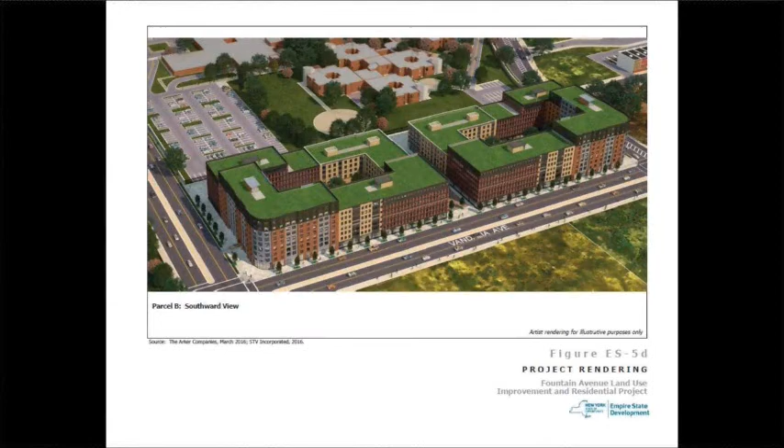Both Parcel B building groups would be situated at the Vandalia Avenue lot line and to the respective lot lines to the west and east at the sidewalk of Erskine Street and Seaview Avenue, respectively. These apartments would include a mix of studio, 1-bedroom, 2-bedroom, and 3-bedroom apartments. As well, the western building group would include approximately 200 units set aside for seniors. Commercial, retail, and/or office space would be developed at the ground floor level of all Parcel B buildings, except for the 2 easternmost buildings of the eastern building group.

Ground floor covered parking would be developed centrally within each building group in Parcel B, about 127 spaces for each building, or 254 spaces total. On top of this parking would be 7,700 square feet of private open space accessible to residents from the second floor of each building.

A new publicly accessible landscaped thoroughfare would be constructed along the southern border of Parcel B, known as Schroeder's Walk, depicted here in this rendering. This would provide a connection east to west from Erskine Street to Fountain Avenue, as well as between the two building groups, connecting to Vandalia Avenue to the north. Schroeder's Walk would be separated from Lot 300, the Brooklyn Development Center campus, by a decorative privacy fence installed along the perimeter of the lot line.

In order to facilitate this development, ESD proposes to override the existing zoning with respect to the following aspects of the project: the proposed commercial and community facility space, allowing use groups 1 through 10 on this site, use of the quality housing program, up to 4.06 FAR, a dwelling unit factor of 680, up to 100% lot coverage with no yards, up to 95-foot street wall height with no setback, parking for 35% of the dwelling units, public sidewalks to be developed with street trees and 10-foot pits at intervals of 25 feet with no planting strip, as well as permitted illuminated non-flashing signage.

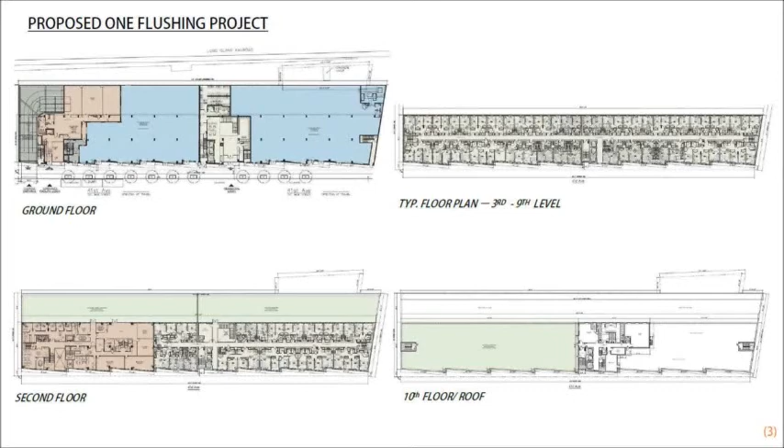On May 11, 2016, the CPC voted approval of the ULURP application and its related applications. On June 15th, the City Council Land Use Committee voted approval of the project modifications. The disposition modification requires that a minimum of 5,000 square feet of the development be reserved for use as a community center or settlement house, non-commercial recreational center, library and museum, or a non-commercial art gallery, or a school. The restriction would last 5 years from the date of the first certificate of occupancy issued for the building. The City Council modifications do not raise any ULURP or SEQRA scope issues, as the project remains unchanged and no significant adverse impacts result from the proposed modifications.

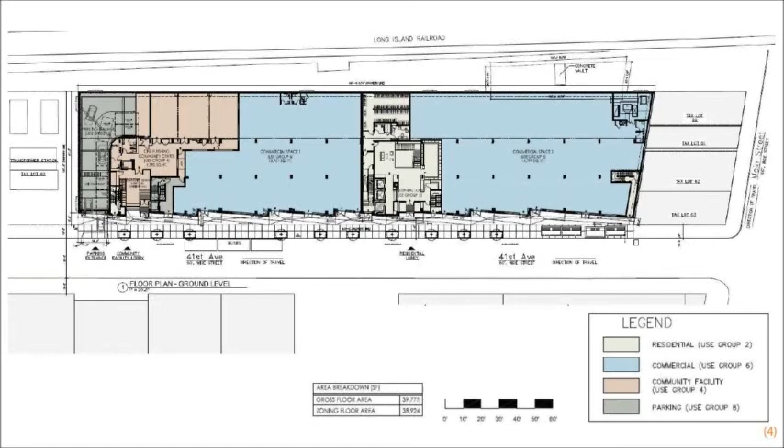Okay, entertain your assent to the City Council's modifications that are, as far as we can tell, totally within scope. So, all in favor? Aye.

Thank you. Our next council modification involves the Water Street Upgrades Text Amendment concerning the infilling of existing arcades along portions of Water Street in Lower Manhattan. Our presenter is Richard Swartz.

Good afternoon, Commissioners. The City Council is proposing modifications to the Water Street Upgrade Zoning Text Amendment, which was approved with modifications by the City Planning Commission on April 25th. Section 197D of the New York City Charter provides that prior to approving a decision of the Commission with modifications, the Council shall file the modified text with the Commission, who shall have 15 days to determine whether the proposed modifications are of such significance that additional review of environmental or land use issues is required.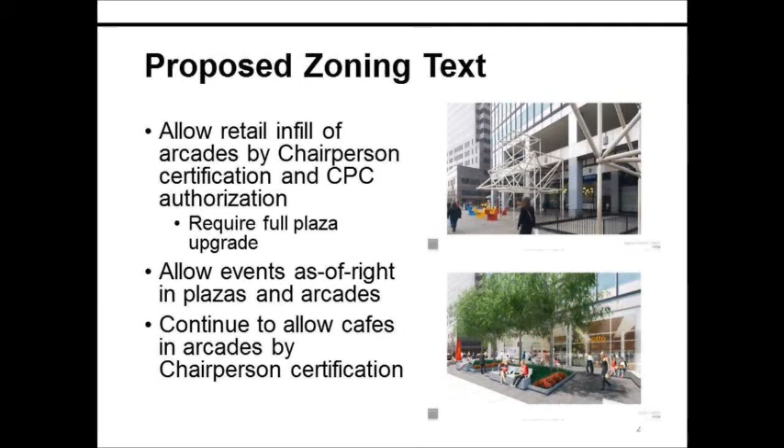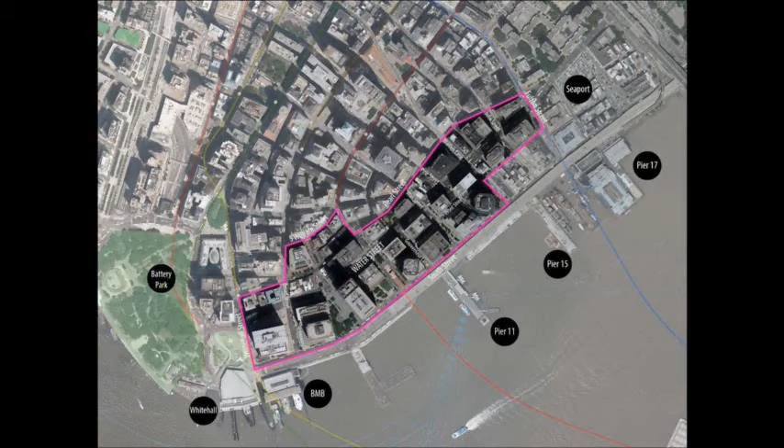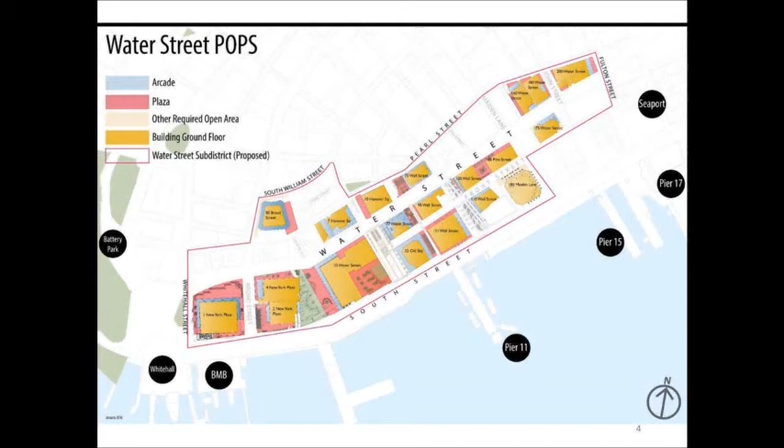Quickly reviewing, this is a proposed zoning text amendment to the Special Lower Manhattan District that would allow the infill of existing arcades and the upgrade of existing plazas by chairperson certification or commission authorization. It would also allow events within the plazas and the arcades as of right, and would continue to allow cafes within arcades by chairperson certification. The text amendment would apply to the area between Fulton and Whitehall Streets, South and Pearl and South William Streets in Lower Manhattan, which is centered around Water Street. Within this area, there are 19 buildings, 17 of which have arcades, totaling approximately 110,000 square feet of arcades, and approximately 225,000 square feet of plazas.

Just to give a recap of where we are: on April 25th, the Commission approved the text amendment with modifications. The Council's clock began on April 27th. The clock would have ended on the 16th, but on the 15th, we received a modification letter. We intend to transmit a scope determination today so that the Council may, at the stated meeting tomorrow, vote to approve the text amendment with modifications.

The proposed modifications still maintain much of the original framework of the zoning text, but further refine what is permitted and expand the public review of future applications for arcade infill and plaza improvements. I'll have some visuals to go through a few of these, but I'll just go through the list.

In addition to a certification pursuant to Section 9183 or an authorization pursuant to Section 91-841, infill of 7,500 square feet or greater will require a CPC special permit pursuant to a new Section 9185. The total area of prior certifications and prior authorizations will be included in the area that would trigger the special permit, except that the area of any indoor public space provided in accordance with the provisions for indoor public spaces in the proposed text would be excluded from this calculation. The Commission would find that the improvements on the zoning lot, which would include the infill and the plaza upgrades, are of equal or greater public benefit to the arcade being eliminated.

Second modification: infill at 200 Water Street and 75 Wall Street, which were previously permitted by certification pursuant to Section 9183 in Area A of the text, is now permitted by authorization pursuant to Section 91-841, which would be Area B in the text. This change is reflected in a modification to Map 9 of Appendix A.

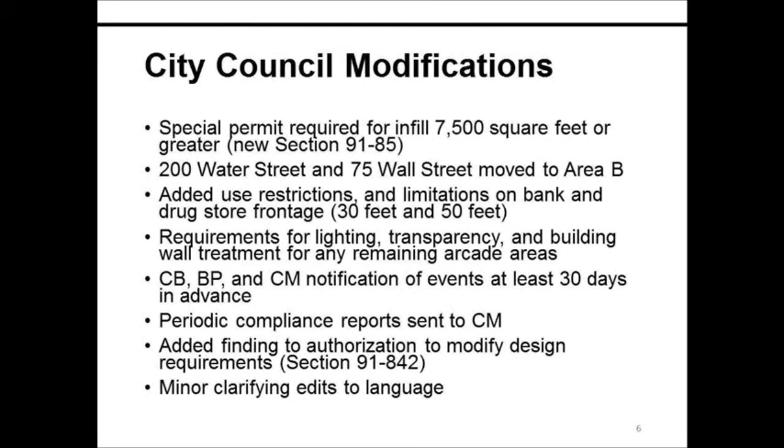There's an addition of a finding to the authorization to modify design requirements for section 91842, which is really a clarification that any waiver of required amenities for circulation paths is the minimum extent necessary. There are also minor clarifying edits to the language throughout the text.

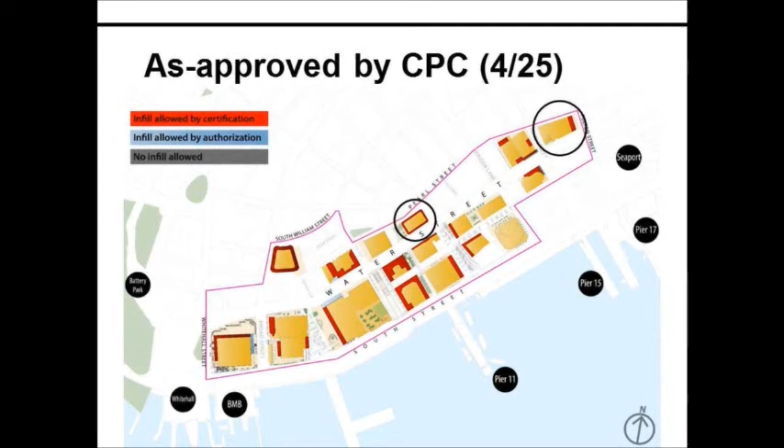And a quick change: they move from certification to authorization. In terms of the change in the zoning text, map 9, which showed where areas A and B are located, would be tweaked so that 200 Water Street would also become Area B, and 75 Wall Street would also become Area B.

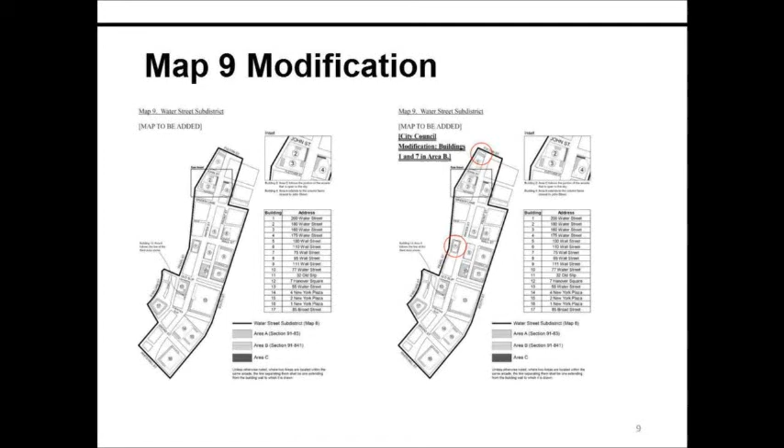In terms of the special permit, there are 7 buildings that could be affected by the requirement for the special permit. This is infill that is equal to or greater than 7,500 square feet. All of these arcades here: 1 New York Plaza, 85 Broad Street, 7 Hanover Square, 55 Water Street, 32 Old Slip, 77 Water Street, and 75 Wall Street.

The arcade areas are generally around 12,000 square feet, with the exception of 75 Wall Street, which is about 5,000 square feet but has 2 levels. So if they enlarge both the first and second floor, they would go over the 7,500 square foot requirement.

I should note that the text is written to be rather flexible. So if you have multiple frontages, say at 85 Broad Street, the text does not require you to fill in all sides. You can fill in 1, 2, any combination, provided that you meet the basic requirements for a full length and depth of a street wall.

Furthermore, if you have a second floor, as at 7 Hanover Square, 77 Water Street, and 75 Wall Street, you are permitted to enlarge, but you are not required to enlarge. I think we'll see a lot of iterations of applicants coming forward trying to implement this text in a way that will involve a range of both indoor public spaces and retail and community facility uses.

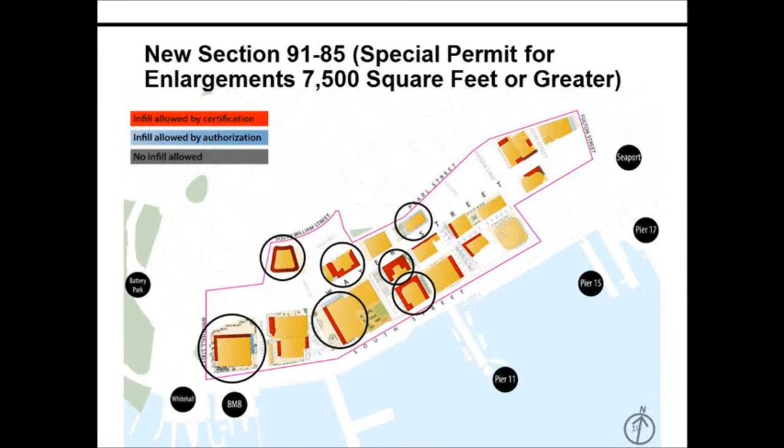In terms of remaining portions of an arcade that are open: if you have 2 frontages of an arcade and propose to fill in just one side, again you fill for the full length and depth of the arcade, and this portion will remain open. There would be a 5-foot candle requirement for this open portion of the arcade, consistent with arcades that are provided to satisfy requirements for pedestrian circulation space in Lower Manhattan and Midtown.

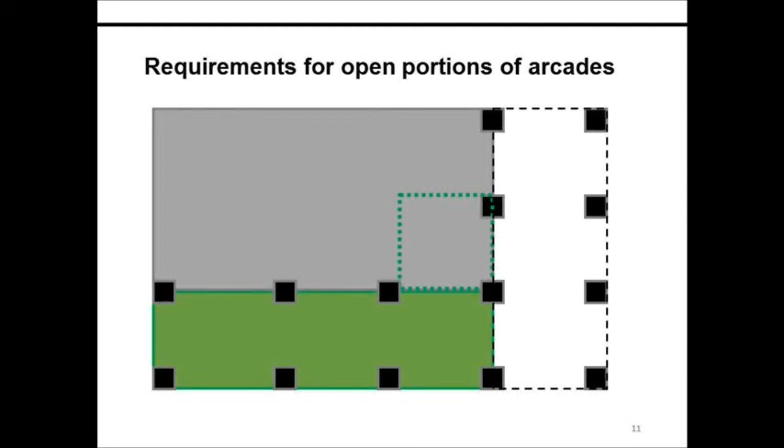Furthermore, if the use located within the infill is located on a portion of the ground floor and has frontage on this open arcade, then the transparency requirements for the infill will also apply to this building wall, which is 70% between the building columns for a height between 2 and 14 feet. Any remaining portion that does not have a use within the infill fronting on the arcade will be required to be treated with decorative material, artwork, or planting.

So that's it for the modifications. Staff has reviewed the proposed modifications and recommends that the commission transmit a letter to the city council indicating that the proposed modifications raise no land use or environmental issues requiring further review. Happy to take questions. Thank you, Richard.

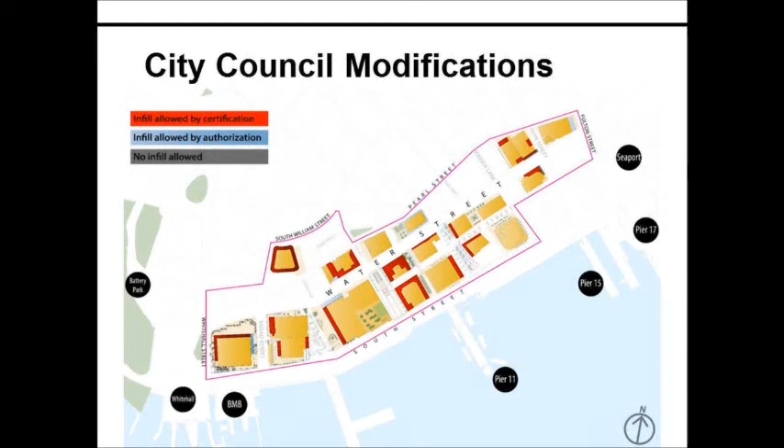Questions for Richard? Mr. Knuckles: the authorization, is that the CPC authorization? That's correct, yes. Okay, and are those reviewable by the council? The modified text does not technically include the council receiving those, but it could be the practice of the department to refer them, and I think the council would be very keen on seeing those applications. Thank you.

Any other questions for Richard? Ms. Levin: I'm not sure I understand the language about the new special permit. Infill of 7,500 square feet or greater will require a special permit. This is the part I don't understand: the total area of prior certifications pursuant to 9183 or 91837 and prior authorizations are included in the area that would trigger the special permit. Correct. Can you give an example of how that might work?

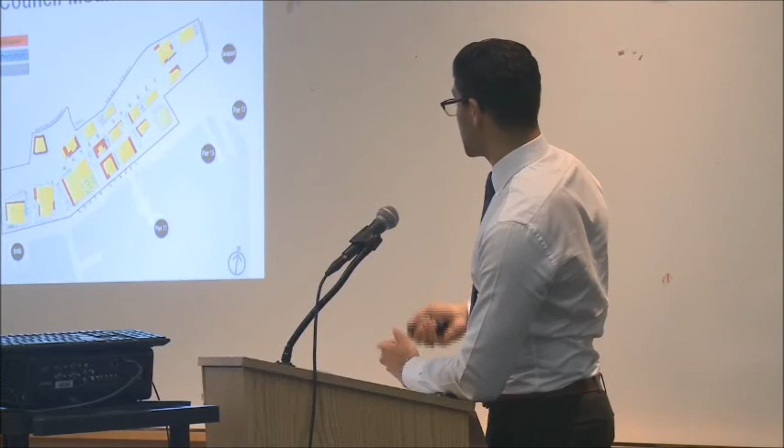32 Old Slip: it's 12,000 square feet. Let's assume each side is 4,000 square feet. If they came in to just fill in the Gouverneur Lane side, that would be a certification because it's below 7,500 square feet. They would upgrade the plaza. Now if they came in later and wanted to fill in, say, the Old Slip side, the two together would equal 8,000 square feet, which would require the special permit.

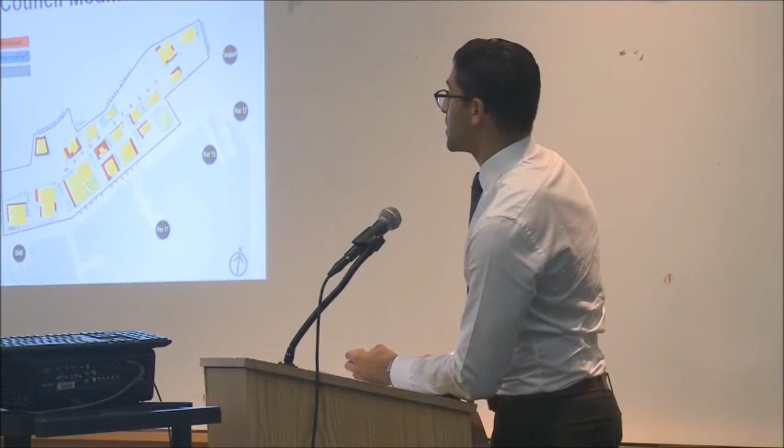And would the special permit then have to be a do-over of the part that got certified? No, they would not have to recertify. They would still get the certification, and the special permit would just be triggered for the new bit. Right, so they would get a certification for this, and then the special permit will just look at the new bit. Okay, right, thank you.

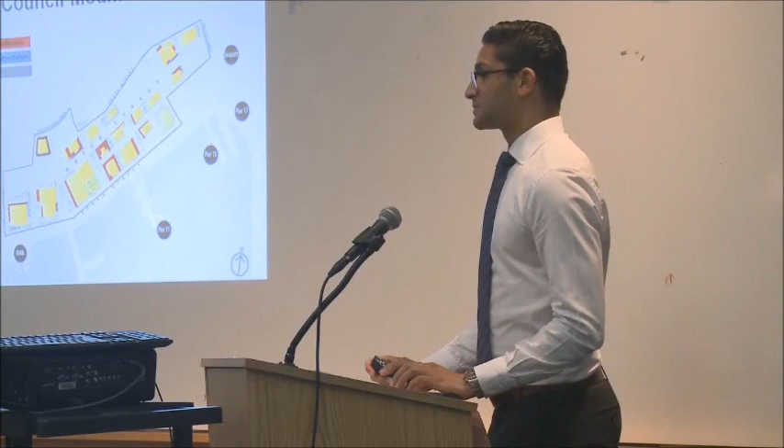Richard, just the meaning of the word 'event' in this instance, is it a performing event on the plazas? Formal event. We do not anticipate informal gatherings to qualify as an event. So if you and your friends had a small potluck, that's in the spirit and intended use of the plazas. So what's meant by event here is a public event. Yes, the text is clear that they must be public.

Any other questions for Richard? This is a long process, for sure. I will ask for your assent to send a letter to the city council saying that these modifications do not raise any land use or environmental issues. All in favor? Aye. Thank you, Richard.

Commissioners, let's now move to the future votes post-hearing follow-up discussion. Staff have prepared favorable resolutions for the following: 2700 Stillwell Avenue, involving a special permit to facilitate commercial use in Community District 13, Brooklyn. We also have the Broadway Sherman Avenue rezoning, a proposed zoning map and zoning text amendment as revised by the applicant during the public review process to facilitate a mixed-use development in the Inwood neighborhood of Manhattan. We have 20 Buttonwood Road, a proposed authorization to facilitate enlargement to a single-family home in the Special Natural Area District of Staten Island. And then we have Cleveland Avenue and Hartford Street, a proposed subdivision of property in the Special South Richmond Development District to facilitate residential development.